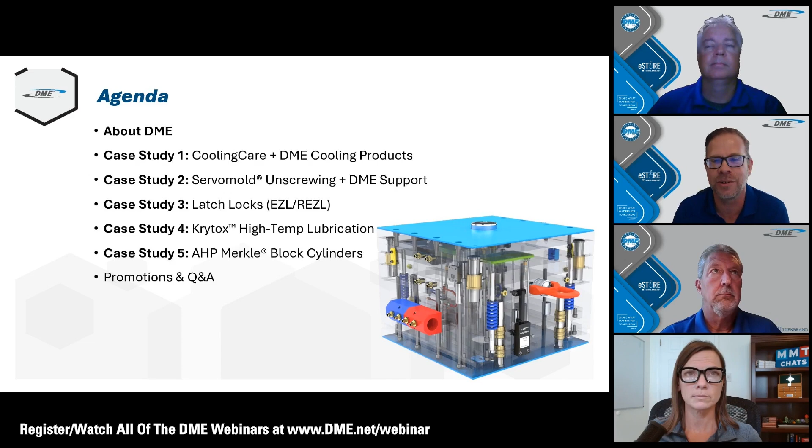What I want to do is take you through today's agenda. We'll have a quick, brief overview of DME, and then we'll go deep dive into several compelling case studies. These case studies will showcase our solutions, including with our partners Cooling Care, Servomold, Krytox, and AHP Merkle.

A little bit about DME: for more than 80 years, we've been a trusted partner in the molding industry, and our philosophy has always been simple, we focus on the part. We have over 60,000 SKUs in our catalog, and we're not just a supplier for you, we are your solution partner. Whether you're facing complex mold making challenges or you need guidance to get that job done right the first time, we're here to show you how to get success every step of the way.

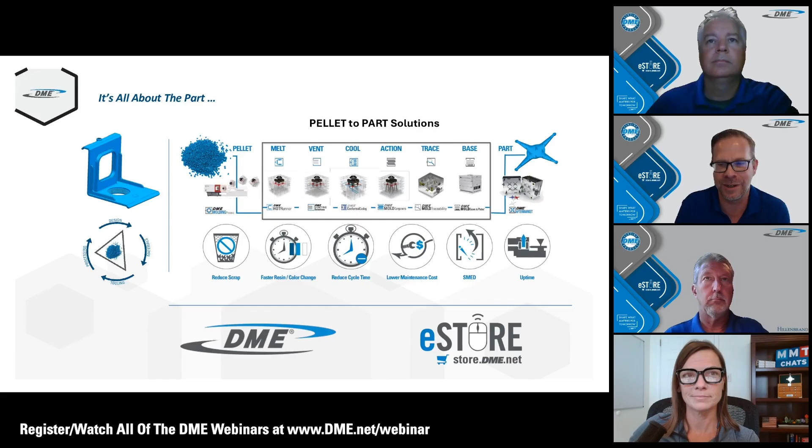Now, without further ado, let's dive into our first case study, and I'm pleased to turn the presentation over to Mike McCutcheon. He's going to talk about Cooling Care.

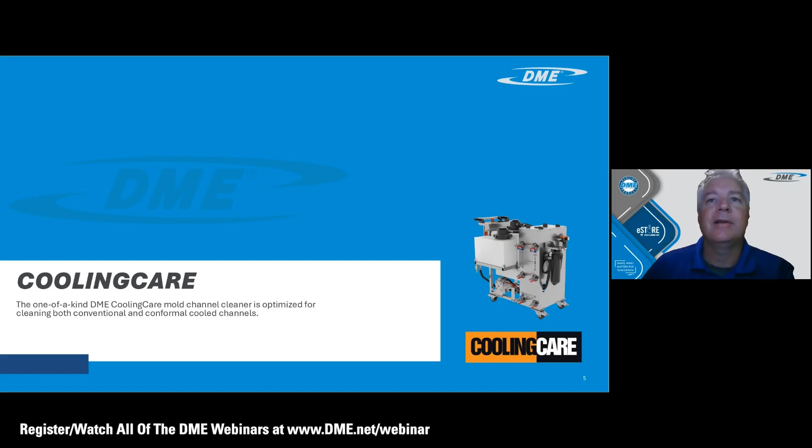All right, good morning everybody. This is one of the funner items that DME sells to talk about and go over, so let's start with the first slide. This is really the problem we try to solve with Cooling Care. No matter how you treat your water, whether you have a closed loop system or just an open system, you're going to end up with scale, especially with the heat and tight passages through the mold base, especially if you're using any type of bubblers or conformal cooling. You're going to get some buildup in there sooner or later, so we see scale and iron oxide buildups within the cooling channels.

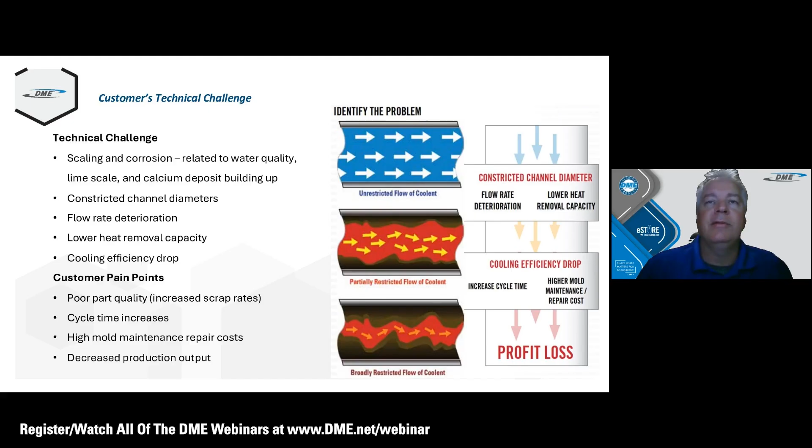They start off nice and free flowing. You set a baseline at the beginning of the mold when it's brand new, and then as the heat and the scale and rust buildup start to happen, the channels get insulated, and the flow gets less because of the less surface area. So heat transfer is less, and that's just like an insulation blanket going on the inside of that cooling channel. We want to prevent that, because that's going to start causing product issues and longer cycle times, to name a few. Those are the main two keys to start noticing if you're not monitoring your flow rates.

So next slide here, our solution is the Cooling Care. We've had this in the market now for probably a good 6 years, I want to say, but it's really a cutting edge technology, user-friendly interface with the PLC. You're able to download information, and you can store up to, I believe it's 3,000 tools.

So you can manage that really quickly, bring the tool over to the bench and just pop in that tool number, and each circuit will memorize what the flow rate should be, so there's no guesstimating on how clean it is or what the flow rate should be. It's already stored in that PLC.

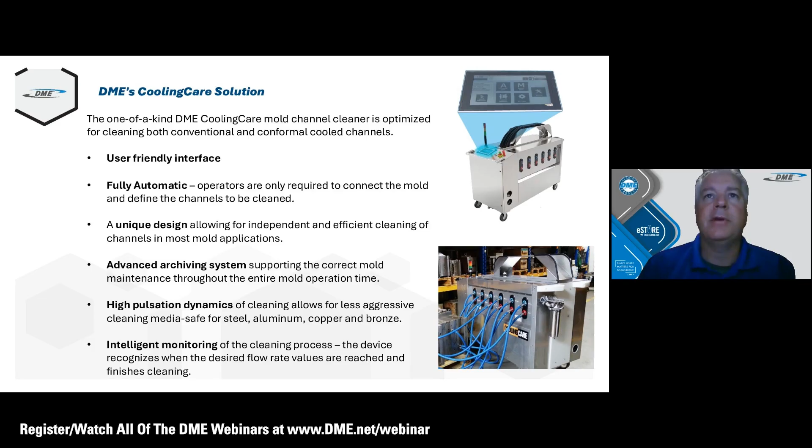So it's a very high-tech machine that also includes heat, pulsation, the pump, and then the media that we sell with it is a really good combination, one of the best in the industry, in my opinion. So next slide here.

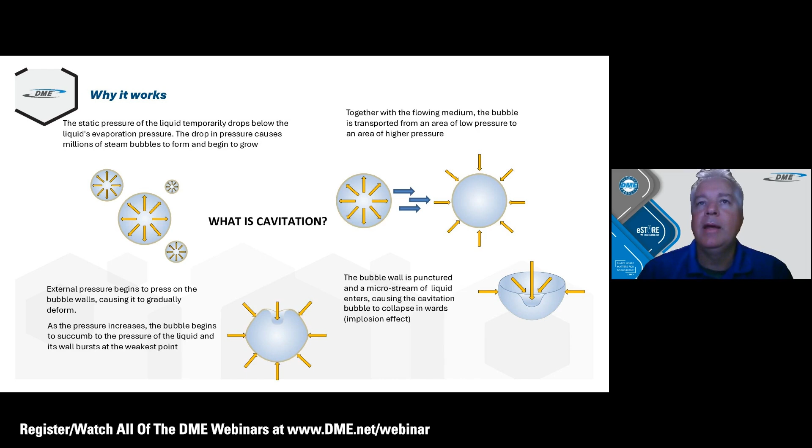One of the keys, or the patented processes, that Cooling Care offers is called the cavitation process. We have a video on the next slide to show the pumping in the system. We can go ahead and play the video here, and you'll get a visual of what's going on inside each of the cooling channels.

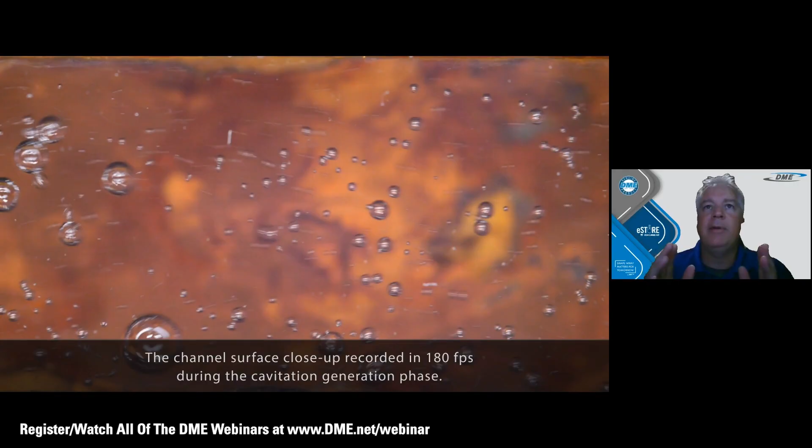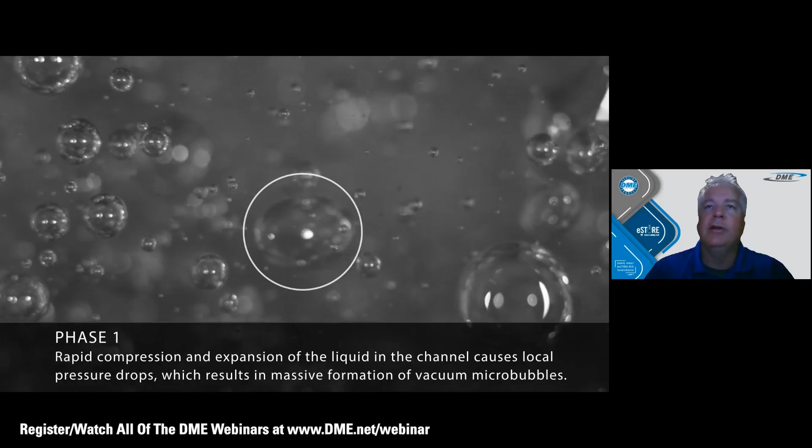As you can see, as the cavitation happens, the bubbles within the channel start to compress and they actually implode. What that does is release steam and do a steam scrubbing inside each channel. That's really the patented process that Cooling Care offers that nobody else can match in the industry. Right there you see the implosion, and that's the scrubbing action.

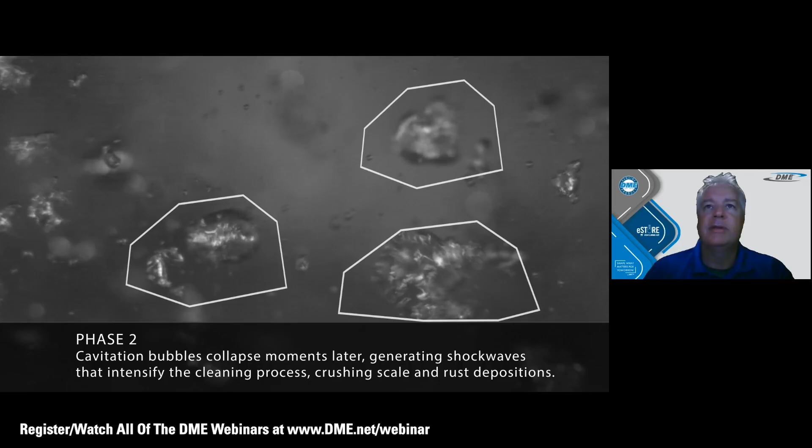There's some other competitors on the market that try to mimic this by injecting compressed air, but they're not getting this implosion and scrubbing action. Pair that with the chemical, the heat, and this implosion action, and it's the fastest cleaning machine on the market, bar none.

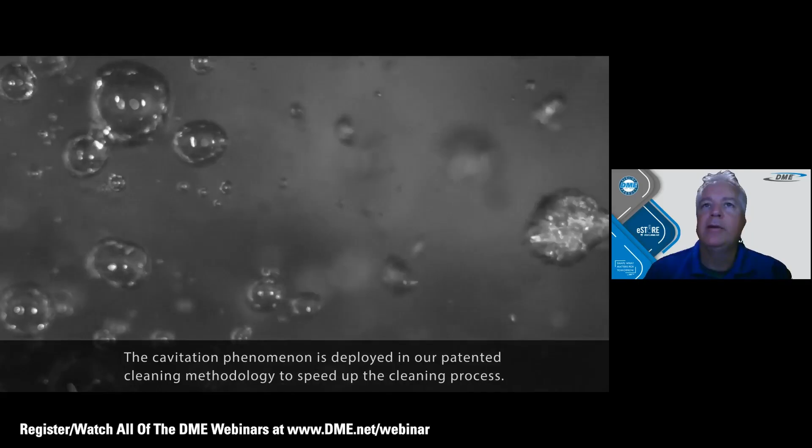So this is the ideal process, and this is what's happening inside the channel to really scrub and break up those particles. Later on you'll see the outcome, the chips and products that come out from this process. It's pretty impressive.

We like to call it gold because it's kind of like mining for gold, and it comes out in big chunks like nuggets of gold. So it's kind of interesting, and it's money that you'll save.

All right, so next slide. We get into our case study. In this case study, what we did was we used the CP2 Duo machine, which is one of the newer machines we've offered. I think we launched this about a year and a half ago. It's a really nice, affordable machine with 2 zones of pulsation and cleaning.

And then it comes with the tank on top for neutralization. So this is a really nice machine at an affordable price with a little bit of manual work to it, but it still gets the job done. Patented cavitation, just like all the other machines.

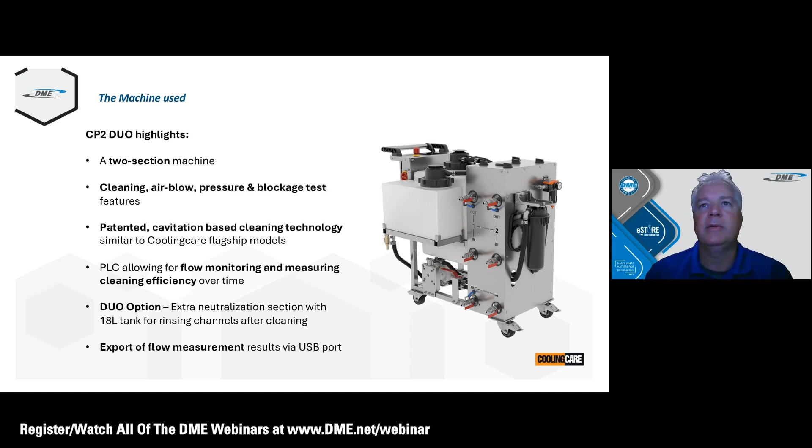It will measure and test for any leaks, and measure your flow rates. It still comes with the PLC to manage all that. So next slide, this is where we get into the case study itself.

What happened was we had a really small 4 millimeter diameter cooling channel that was plugged, causing major problems in production and quality, and longer cycle times. So we took on the challenge with the Duo machine, and this is the setup currently.

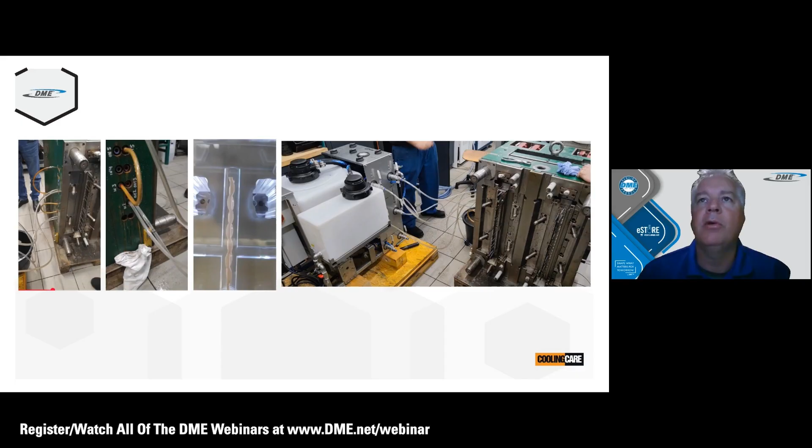Go to the next slide please. You can see there the 4 millimeter diameter is highlighted on the right, and the machine's hooked up to all the cooling channels there.

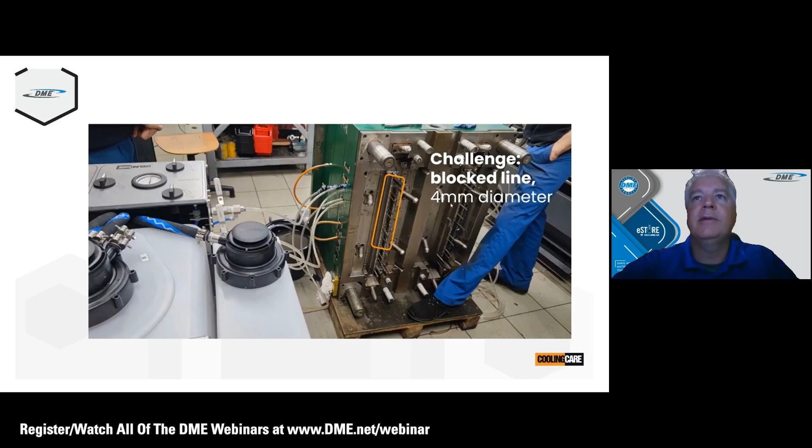So it gives you all the information, like I said earlier, your flow rates, your pressures, and everything like that. So next slide.

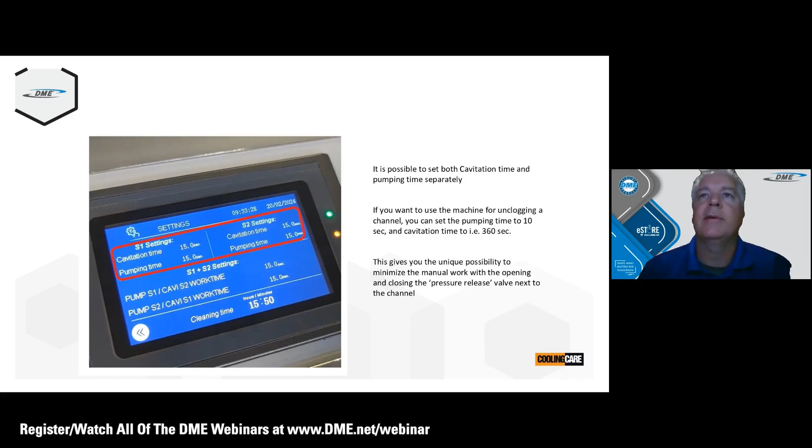So what we did was, this one was plugged. We like to get called in when we have some major problems to solve, because we usually can come through on it.

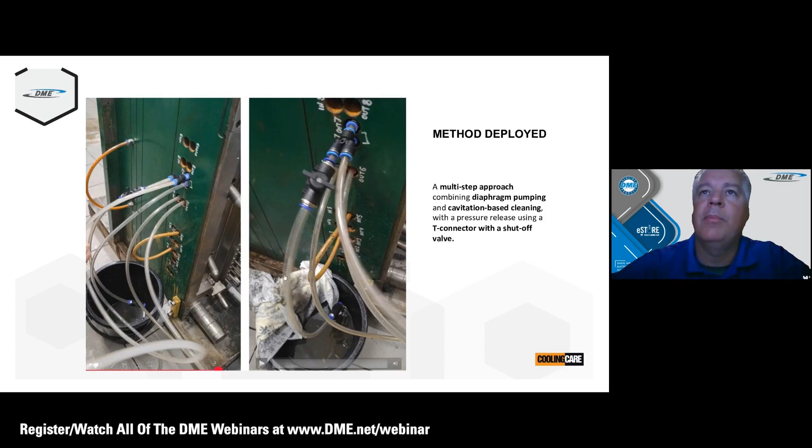This is one where we added a little T valve here so that the machine could fill up the channel and make sure it's getting all the water and everything to the source of the plug. Go to the next slide real quick here.

We fill everything up, and then once the pressure meets its maximum of what you set it at for that particular channel, it will stop. Then the cavitation pumping action from the diaphragm starts to try to pump, but it can't because it's at the maximum PSI, and there's just no room for that liquid to move back and forth.

So what we do is crack the T valve slightly and let a little bit of the pressure out, and then that diaphragm will start moving back and forth. As we showed you earlier, it's going to move that water in solution, and with the heat and the chemical all mixed together, it starts to eat away at that breaking point or that plugged area. Within I believe 4 hours of this one, we were able to break that free and get free flowing water to go through and start cleaning out that channel completely.

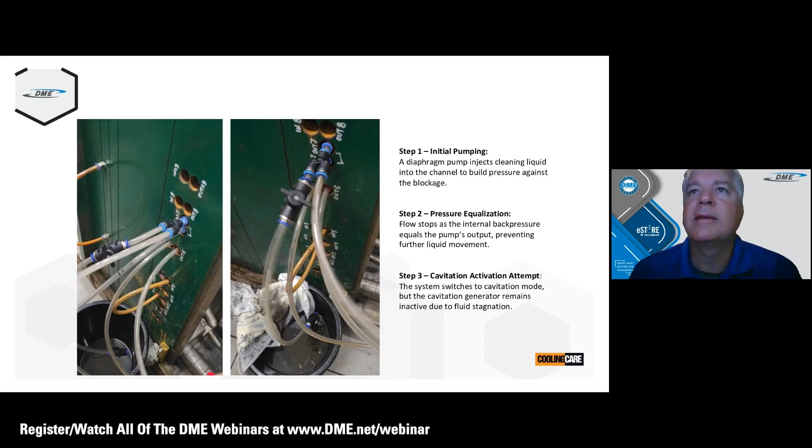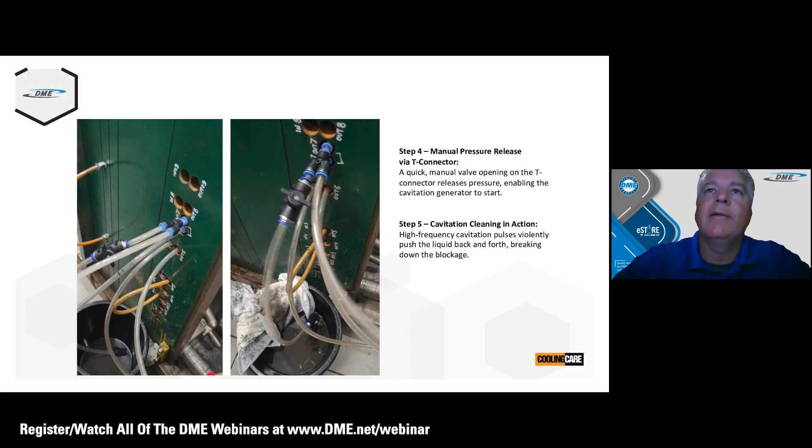Next slide, please. So this helps, so it's not so manual of turning off the valves and moving everything around within the system. Just the little crack of the T valve is what we're showing here, is really all that was needed.

Next slide. This is when you don't have a blockage, you can just hook it up directly with your standard cooling hoses. You can see this is in a tool room here, and it's just a standard maintenance process. This is where you'd want to be, where whenever your tool is down for maintenance, you throw it on the machine, let it run through the process, and say okay, this is tool number 1, 2, 3. All my channels are flowing to the flow rates that they were originally set to flow at when I first entered this tool into the PLC when it was brand new.

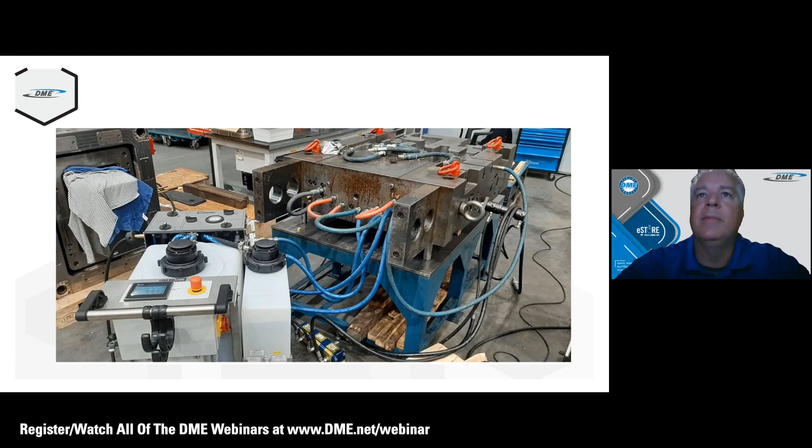And the machine will stop as soon as you meet those flow values again, so you're not wasting a lot of time. A lot of the other products on the market are just plug it in and you let it clean, and you don't know if you need 2 hours, 20 minutes, or 8 hours to figure out if it's clean or not, because everything is all right in this system here. It tells you instantly, and you're not wasting a lot of time, and you can get it onto the next tool that's needed. Next slide, please.

So this was kind of the gold that we got out of that plugged unit there, and it shows the flow rates in the upper left-hand corner from the PLC, how they went from 7 to 12 and 7 to 12 there, and 4 to whatever that next number is for percentage there. So it's major flow rate increases there, and cleaning out the channels.

You can see the pictures from the endoscope on the left and right, and you can see how dirty those were. So it's just all that scale and lime buildup. And again, you get these pieces that break free, and it's a pretty impressive machine that kind of pumps that right on out of there. It's really just hindering your heat transfer big time. So next slide.

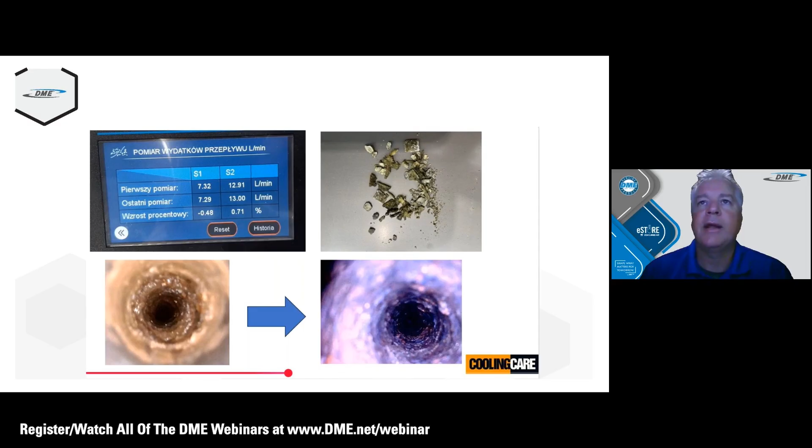This is what we have to offer. We've expanded the line, as I stated earlier. There's a CP series, which is the good product. It's very simple to use, typically a single zone, has pulsation, but typically does not have heat. So you save some money there, but you may have a little bit longer cleaning time without the heat.

The CM and CMS series, we have a couple different series there. That one does have the heater option, and then it usually comes with an optional pulsation zone, typically 1 zone for those, and comes in 4 to 7 zones of the pumping action just to get the material through the tool itself to clean it.

If you have a good maintenance program going, and you don't let your systems get plugged up, and you don't inherit tools that are really gummed up, the CM series is a really good series to employ in your operation. You don't really need the pulsation as much if you don't have really gummed up tooling, the chemical and the standard pumping will clean everything up pretty well.

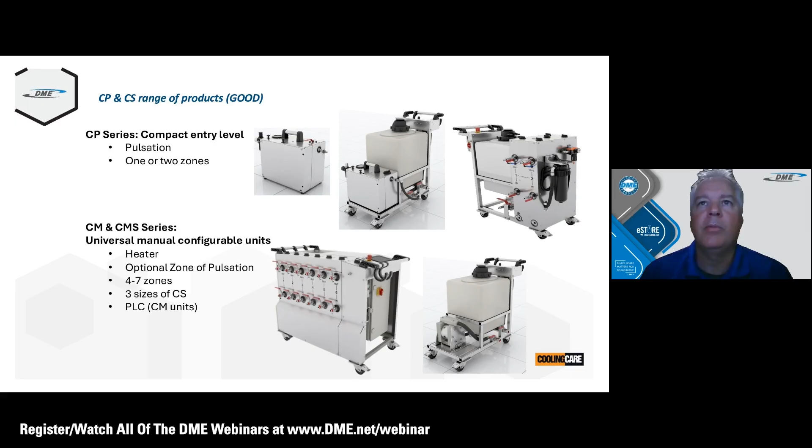The nice thing about this unit is that the PLC walks you through every step and will highlight which lever needs to be turned in which direction. So it's very user friendly.

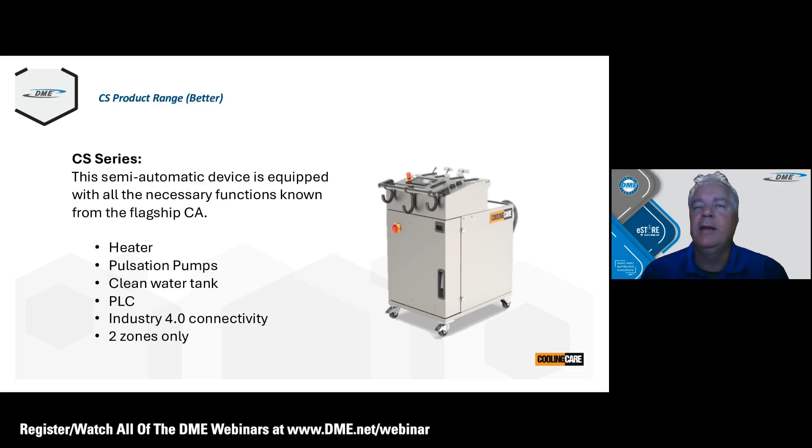Next one, and this is the flagship unit here. These are the CA units. It has everything. You just hook it up and put in the PLC which tool you're utilizing and which channels you hooked up to, and just let it go. You can put it onto the cleaning section and it will do all the testing. It will do the air pressure tests, the flow tests, and then once those all pass, it will go into the cleaning mode. And if you set it to the return to normal mode, it will clean until that has been achieved on those flow rates.

Then it pushes the cleaning chemical back into the tank, all contained with compressed air, and blows it out. Then it has a diagnostics tank with clean water that it runs through and does all your checks on flow rates and things like that. So a really cool unit with all the bells and whistles.

It has Industry 4.0 connection, so if you hook up a SIM card to it, it can give you a text if there's a problem, where it stopped, or if the cleaning is done. So really interactive units.

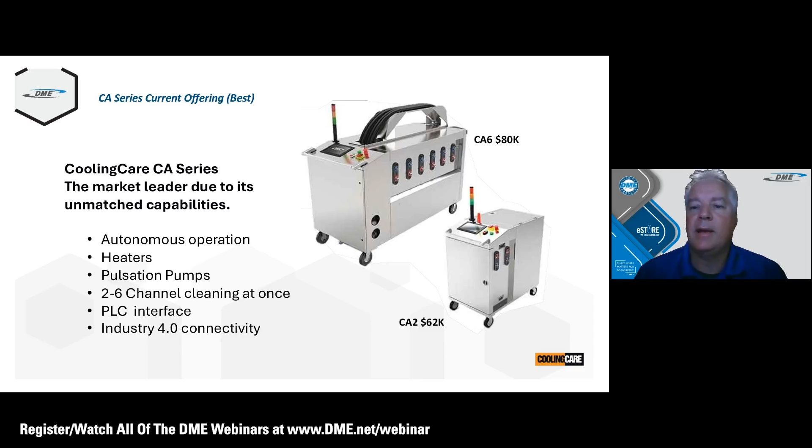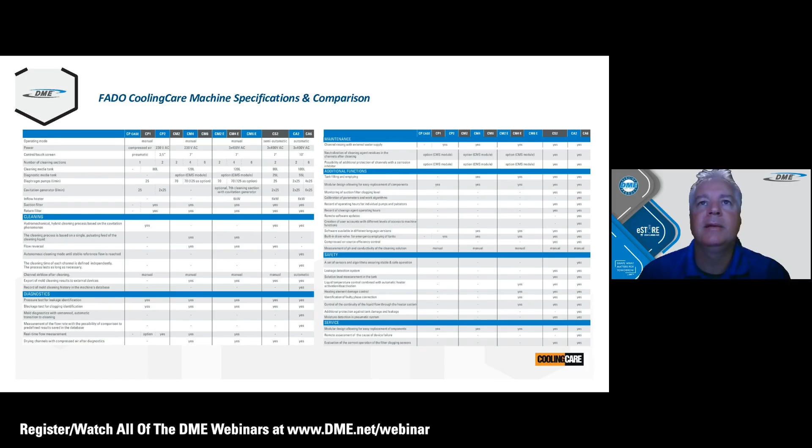A couple more small case studies. 200 conformal inserts were fully blocked. The customer was considering a full replacement of the whole fleet at the tune of $250,000. This is where Cooling Care really shines - these conformal cooling inserts, hooking them up and using that cavitation process to get them unblocked, because you have so many contours and small dimensions within the conformal cooling arena, and those are expensive. So you want to make sure you can save those, keep them clean, and keep them operating to their potential, because that's what you invested for, right?

It's to make sure that you got a really nice part out of there in a quick amount of time, and this is really what you need to clean those up and make sure you're getting the best out of your investment. So no cost to replace those or have them made, or even wait for them to be made. Just hook up the Cooling Care machine, and within a few days you'll have an insert ready to go.

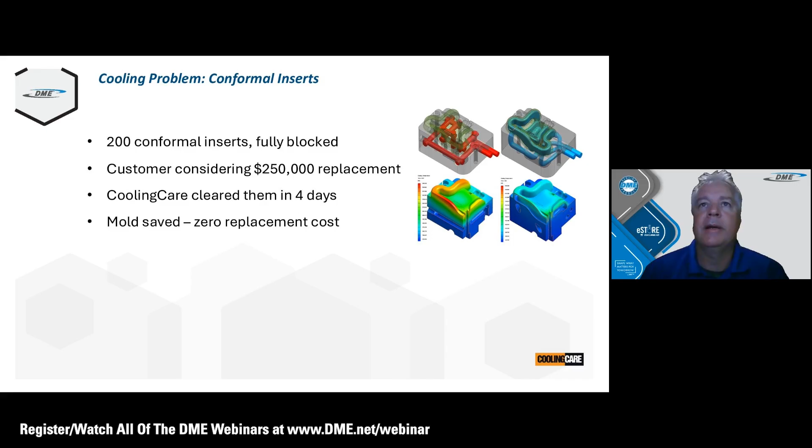Same with bubblers. Bubblers are super standard, right? The dimensions on these get pretty small, 2 millimeters in this one. Typically it was taking 5 days to pull that tool out, disassemble it, clean them up, or buy new bubblers. Again, another 2 to 4 hours of cleaning and increase the flow by 200% through these bubblers.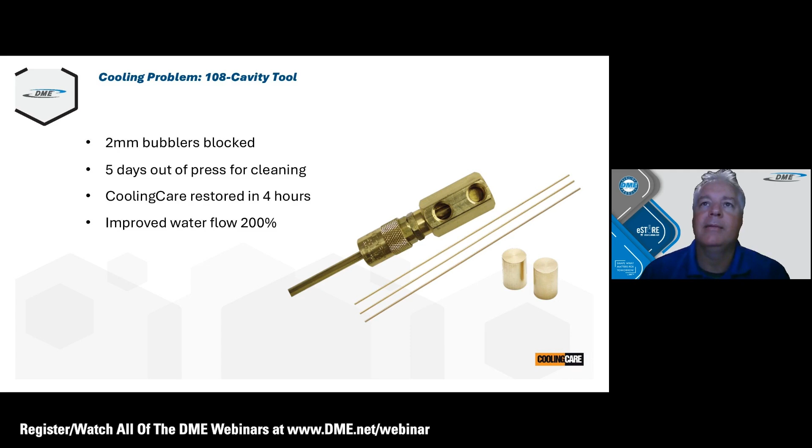And so that's it about Cooling Care. If you have any questions on that, please enter them into the chat, and we'll get to them at the end. I also just want to talk about FlowSense really quick.

On the next slide, if you're utilizing Cooling Care, or even if you're not using Cooling Care, this is a really great tool here. It monitors all your flow rates, gives you temperature, pressures, delta T's, everything you need to know about your cooling channels. It comes in multiple arrangements depending on your application.

There's the FlowSense 1 in the bottom right. It will do temperature, pressure, and flow rates for a single zone. The 2, in the middle on the bottom, is more of a stainless steel option, so if you need stainless steel manifolds, and it has the separate readout there with the cord.

The 3 and the 4 are identical units. The 3 is just mounted right to the manifold itself, the water manifold, in the upper right-hand corner there. And the 4.0 is on the left. You can hook up to 4 different manifolds there, monitoring 48 zones of cooling.

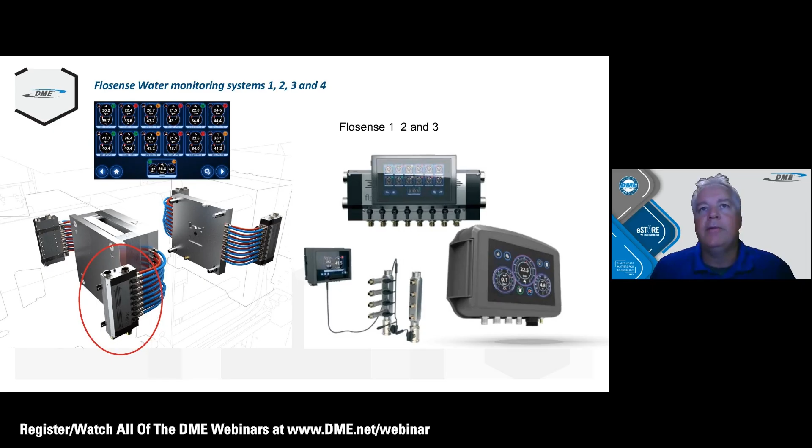And that's all for me. So if you have any questions on any of this product that I went over, please put something in the chat there. I'll be happy to answer it later on.

Right, Jeremy, your mic might be muted. I apologize for that, it was muted indeed.

Jeremy Such here, just want to do a quick overview of a servo mold application and then talk about latch locks for a few minutes.

Servomold is a German company, and DME is the exclusive partner of Servomold for the United States and Canadian markets. So we work closely with them when a customer brings an application to us. They engineer and design the system to meet the application needs, and then DME facilitates the installation and startup of that system here in North America.

Servo mold can be either an unscrewing device or used for plate movement. When used for plate movement, the plates can be moved in increments of 180 degrees or 120 degrees. As we're going to look at here as an unscrewing device, there are several different types of configurations that can be put together to meet the application need.

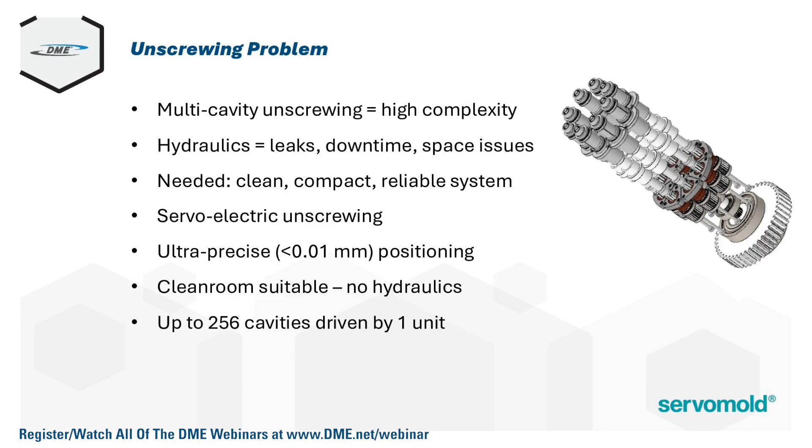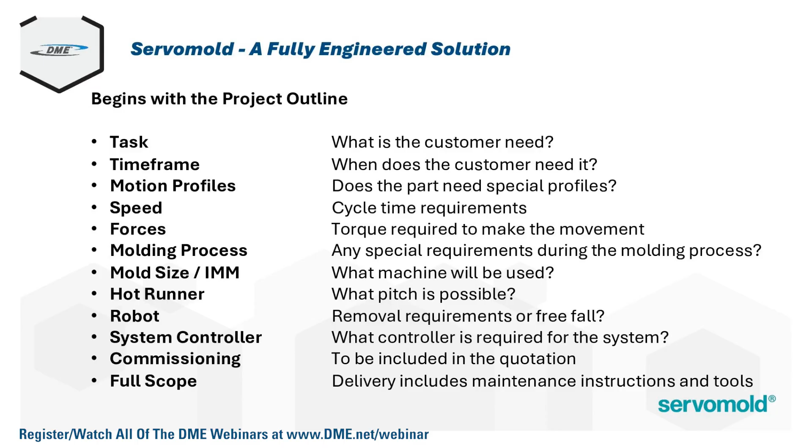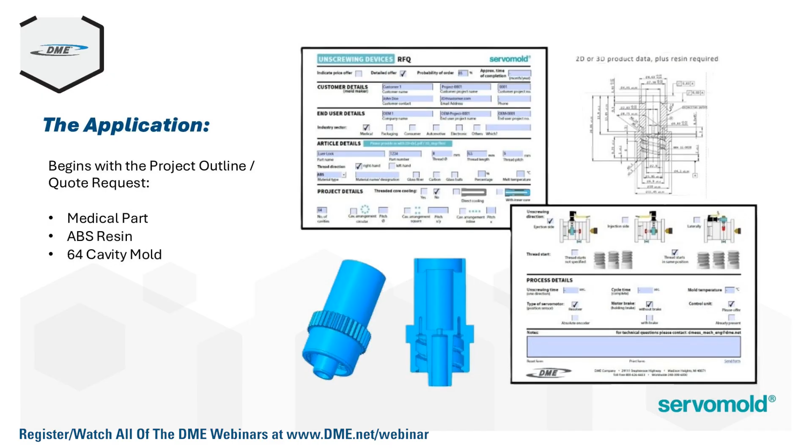In this particular application, this was a medical part. ABS was the resin, and the intent at initial design was for a 64 cavity mold. So again, based on that part size, the length of the unscrewing and so forth, servo mold went to work with our application engineers. Next slide, please.

Again, just as a part of the design, Servo has a number of different standard configurations of the drive mechanism. That doesn't necessarily mean standard in size, it just means standard in configuration. So in this particular application, we were looking at actually one drive that through a series of contained gears, is going to drive 6 different cores.

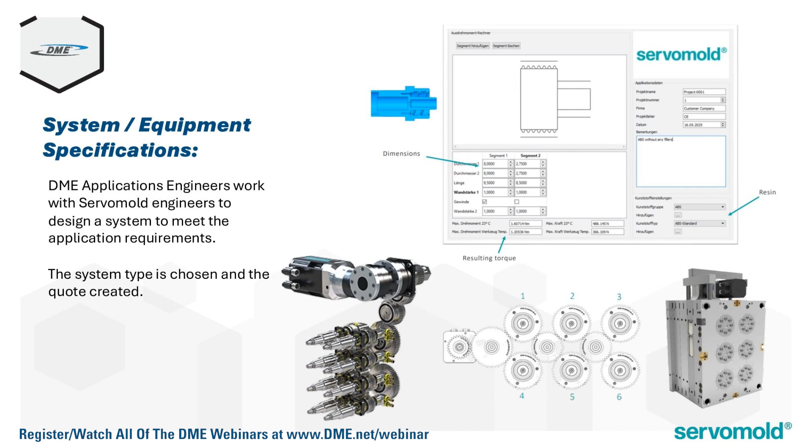Next slide, please. And then each one of those cores ended up with 8 actual unscrewing cores on them. So the project, although initially expected to be a 64 cavity, through the design of the servo system, was actually reduced to a 48 cavity. This, of course, in very close conjunction with the mold maker and the mold owner. And this is driven off of one motor here, this particular application. That's what was designed for this.

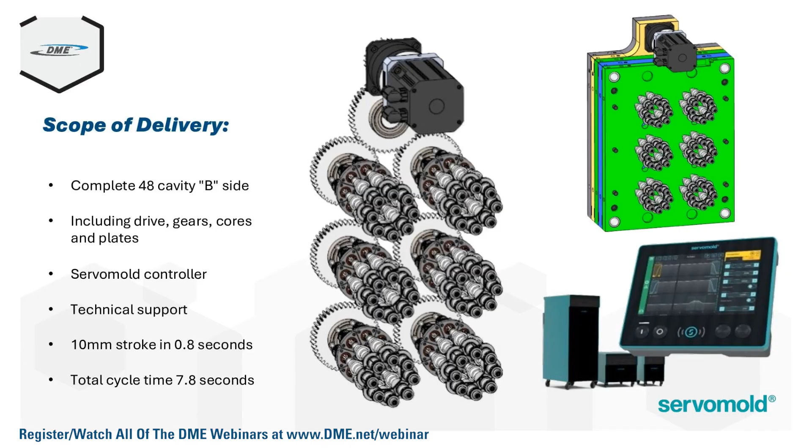Servo mold also, we do try to bundle the actual controllers with the drive mechanisms. That doesn't necessarily have to happen, although bundling with the servo controller is very convenient, because servo actually will write the initial control algorithms right at the mechanical design of the system. But if we do introduce a third-party controller, then that just creates a little bit more work for the mold designer to do with that controller supplier. Next slide, please.

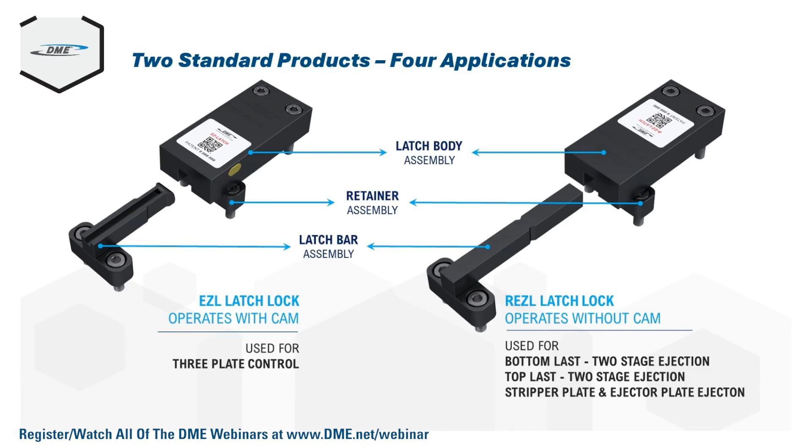Again, very high level on that. I apologize, we're so short on time. But servo has a lot of different applications, and we'd certainly like to discuss your next plate movement or unscrewing opportunity with you.

Moving into a standard mold component here, not necessarily customer application driven, but application driven with regard to the different products offered in our Easy Latch latch lock family of components. On the left, you can see our original and standard Easy Latch lock for 3-plate control. On the right, we have our REasyL or reverse Easy Latch product, used for even more complex multiple plate control.

The standard Easy Latch for 3-plate control. For the configuration here, the latch lock body goes on the top clamp plate, the latch bar goes on the B plate, and the retainer goes on the A plate. This step diagram shows the motion of the plates as the mold opens.

Basically, the EasyL allows for precise 3-plate control during the parting line opening. The B plate and A plate move together for the designated stroke to strip the runner, and then the B plate disengages from the A plate, allowing the parting line to open.

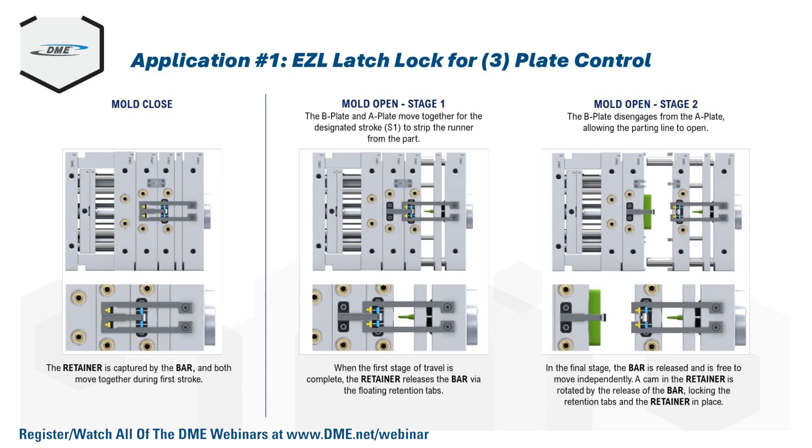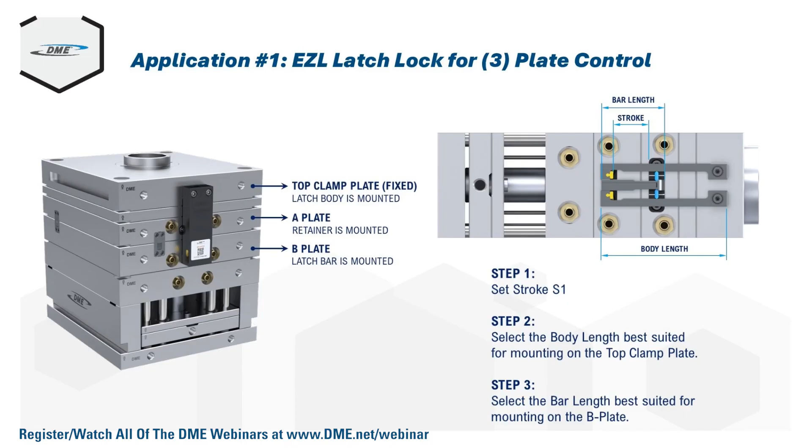Here you will see where the different components of the Easy Latch mechanism are mounted, which plates they're mounted on. You see a cutaway view of how the internal latch mechanism works, how it's configured, and what it would take for the mold designer to configure the specific Easy Latch product for the mold they're working on.

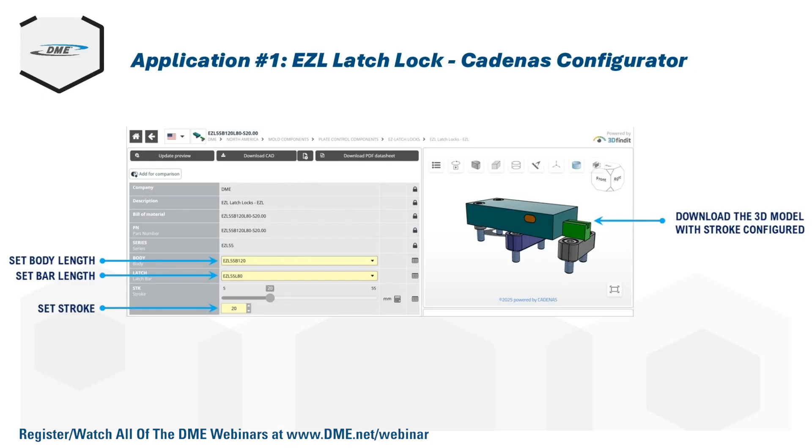We introduced about 2 months ago, in the DME Part Solution or Cadenas platform, complete product configurators for all our Easy Latch products, where the mold designer can choose his application, whether for the EasyL or REasyL products, and set strokes and so forth. The part number will be configured automatically for them, so it will be easy to contact DME customer service or go to eStore. As importantly, or perhaps more importantly, the CAD is generated via the platform, so the mold designer can drop it right into their design.

Applications 2, 3, and 4 are all based on our reverse or REasyL latch locks, for a bit more sophisticated plate control, same principle as the EasyL product. I skipped over that the EZL latch lock uses an internal cam mechanism used to lock and release with the movement of the plates. The REZL products do not use that cam; all of the release and capturing of the plates is controlled via the latch bar and internal components in the latch body. The first application for the REZL product is two-stage ejection bottom last plate control.

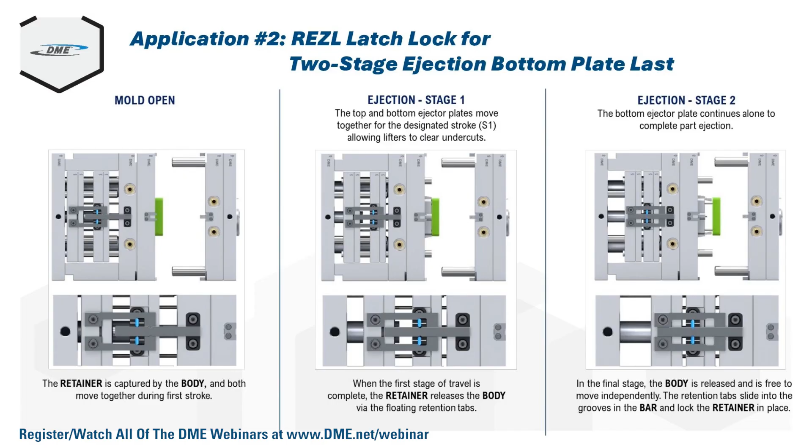Both ejector plates, spaced apart, move together for the designated stroke S1, the first movement. Then the bottom ejector plate is released and continues to move independently for the final stroke of the application, so the part can be ejected.

Mark, did you advance the slides? I had a glitch there in my display. One more, please.

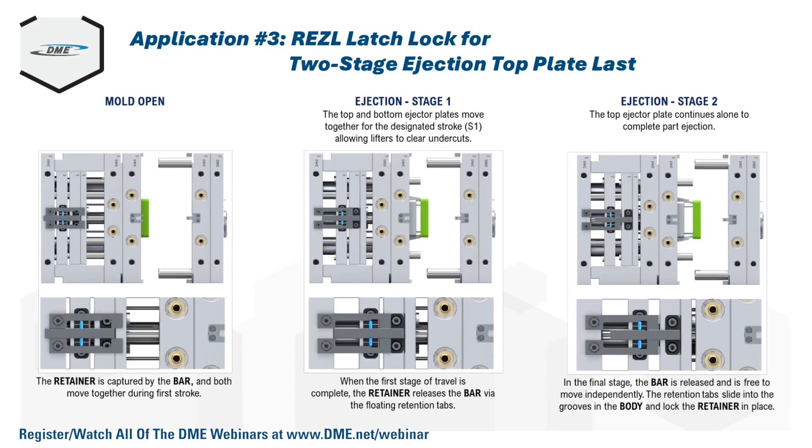Application 3, as noted, is again an REZL product, and in this case it's configured for two-stage ejection top plate last control.

Here you can see where the components are mounted. We're using the same product, just configuring it slightly differently and rotating how it's mounted to the actual mold base. In this configuration, the body is on the fixed bottom clamp plate, the latch bar is on the top ejector plate, and the retainer is on the bottom ejector plate.

This configuration allows precise plate control over the top last two-stage ejection process. Both ejector plates move together for the first stroke S1, and the top ejector plate continues to move independently for the final stroke required to eject the part. So again, just the opposite operation as the previous example.

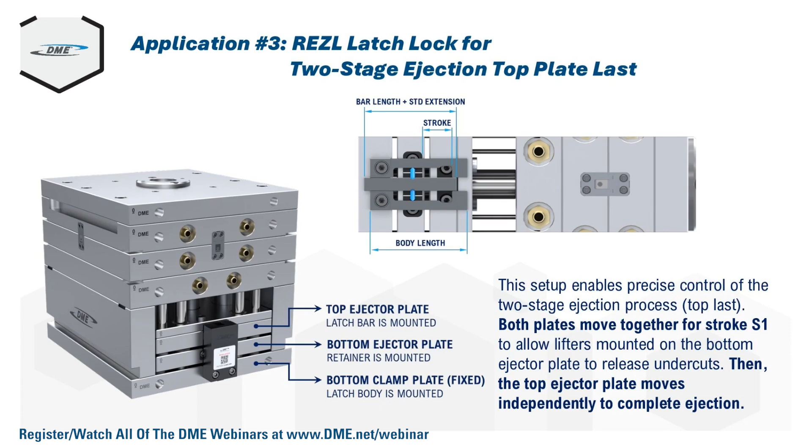I think I skipped over this previously, but again, this configuration is also fully configurable within Cadenas to help establish part numbers based on stroke and provide the CAD for the mold designer.

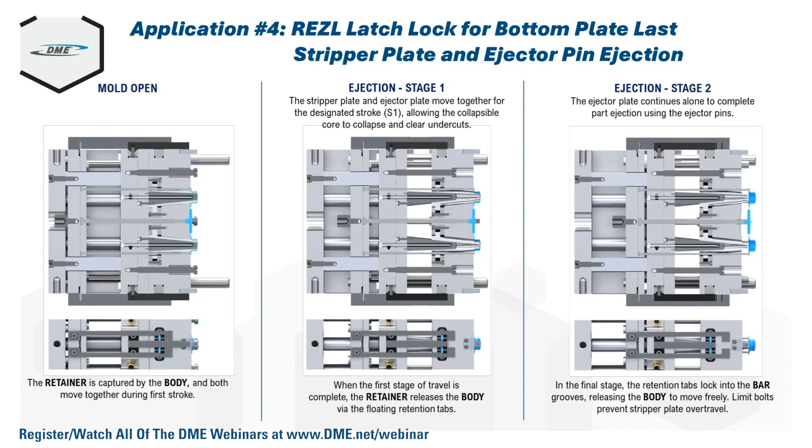And next slide, please. And the last application we want to review this morning, as noted, another REZL application for bottom last stripper plate and ejector pin ejection.

Next slide, please. Here again, looking at the mounting, in this case the latch body itself goes on the ejector plate, the latch bar on the support plate, and the retainer is on the stripper plate, the B plate in this application. So this configuration allows for precise control of both the B stripper plate and the ejector plate.

The stripper plate and the ejector plate move together for the first stroke, S1. This synchronized motion is critical for collapsible core applications. After that first stroke, the ejector plate continues to move independently for the final stroke needed to eject the part with ejector pins.

So we really crammed a lot in there in a short period of time because we are so limited. Basically the intent of this quick presentation is just to demonstrate the versatility of the EZ Latch product line. These are all stock products for DME.

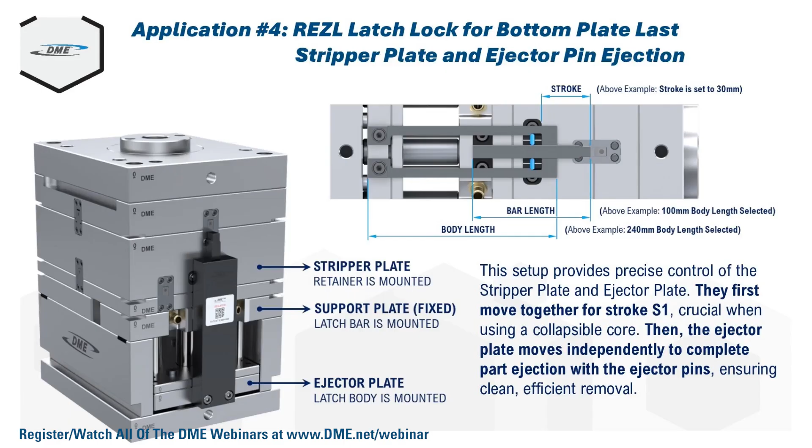If we go one more slide, please, Mark. Again, I just wanted to make sure the audience is aware that the Cadenas configurator is now fully up and running and available, for part number creation and assistance. Sometimes it can be a little confusing for the mold designer to establish stroke and determine what he really needs in the way of a particular assembly. The configurator will auto-generate part numbers and really facilitate that mold design, making it quicker and easier.

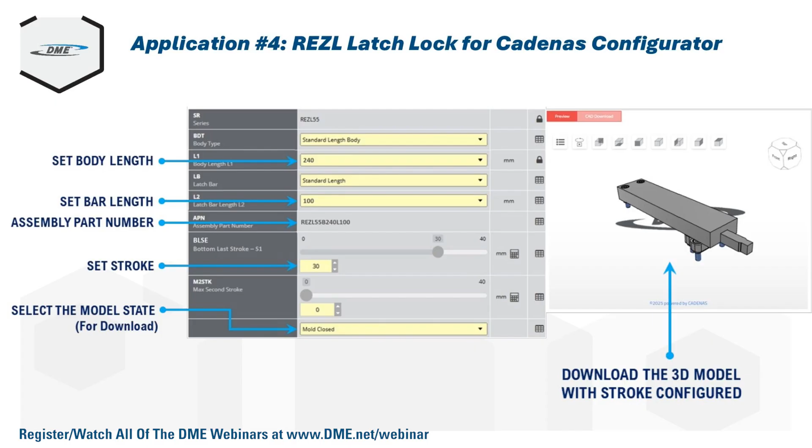Any questions at all with regard to the EZ Latch products? Our engineering team is readily available. It can actually help you if the Cadenas platform isn't sufficient for the work that you're doing. So thank you for your time. Again, any questions, please drop them in the chat and we'll address them at the end of the presentation. Thank you.

Okay, Neil, you're up. Check your mic. Can you hear me? We can hear you. Good. Let's proceed.

Okay, we're talking about the Krytox TM7 grease. We have a case study where a customer was experiencing pin breakage on some 12 millimeter pins in a high heat application. What we specified was the Krytox TM7, and he applied the grease and actually went from 50 to 150 shots where he was receiving failures, to over 10,000 shots without any breakage.

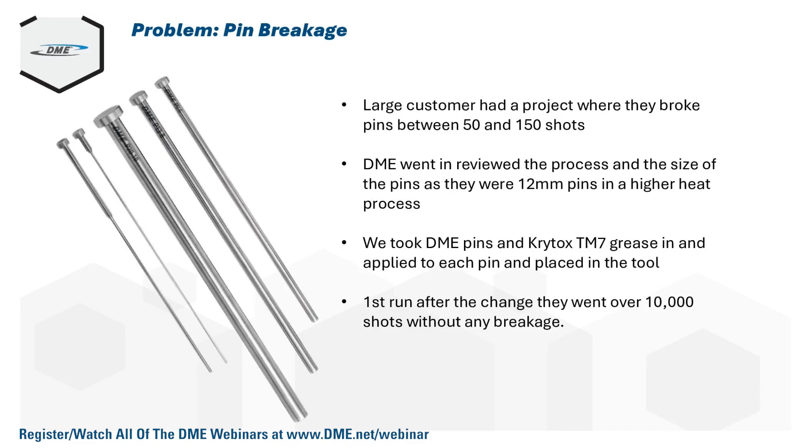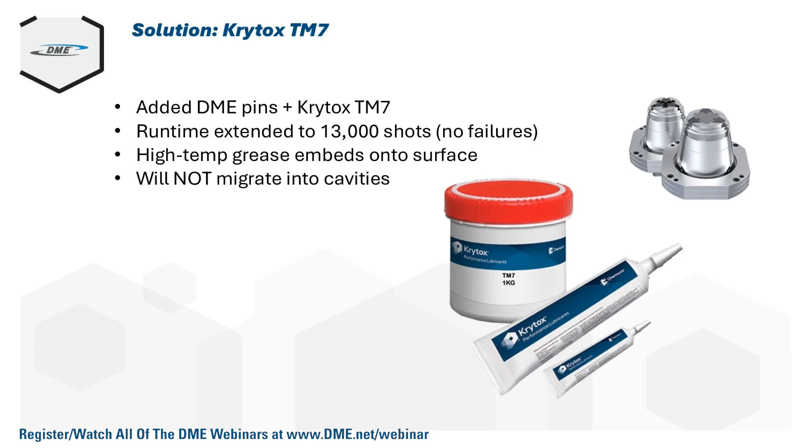Next slide. Also extended the runtime up to 13,000 shots without any failures. The high temp grease actually embeds into the surface of the metal on the pins and it won't migrate into the cavities. DME also recommends and actually provides collapsible cores with the Krytox grease on the mechanisms.

Next slide. The Krytox is superior to a hydrocarbon grease. We've done some testing in an oven where at 232C for over 40 hours, it shows that the Krytox had zero weight loss versus a hydrocarbon grease, which experienced 40% loss. So the Krytox is non-flammable, it doesn't have a flash point, it doesn't oxidize, so it has an indefinite shelf life. There's longer maintenance cycles, exceptional lubricity, and it doesn't migrate from the point of application.

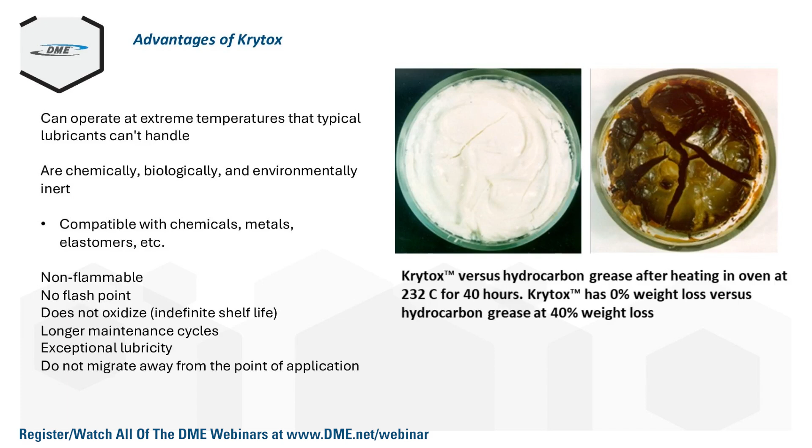Next slide. This shows just contamination of grease as determined by color. When using the Krytox, it's recommended that you wipe off your pins with mineral spirits or mold cleaner and a rag. And also you can start with new pins as well, which is recommended.

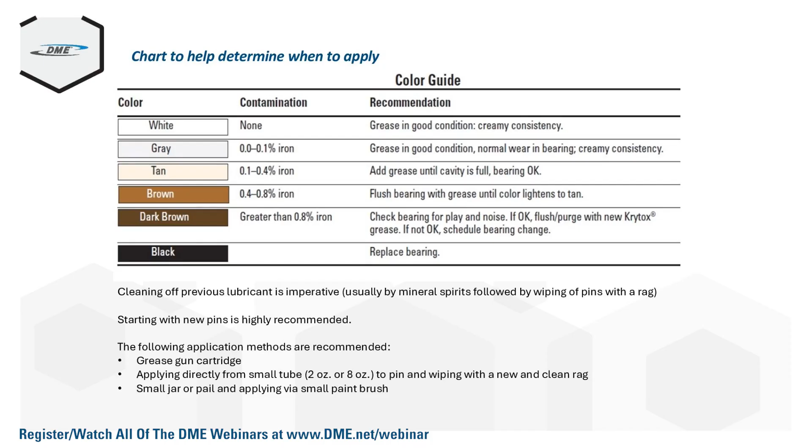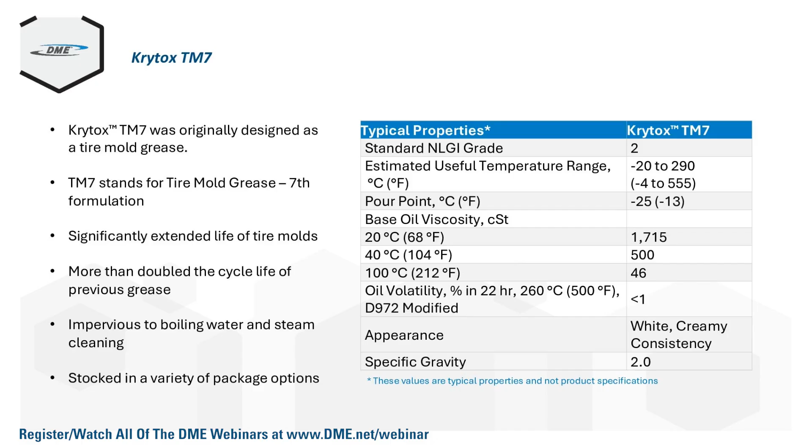TM7 stands for tire mold grease, 7th formulation. And it's impervious to boiling water and steam. So it's a really good product. There's also a higher heat Krytox available, which is their valve grease. So if you need something over 555 degrees F, give us a call and we can talk about the higher heat grease.

Next, we're going to talk about the Merkle AHP block cylinders, and we're comparing the block cylinder to a typical tie rod cylinder. As you can see, the block cylinder is one piece. It also is very robust.

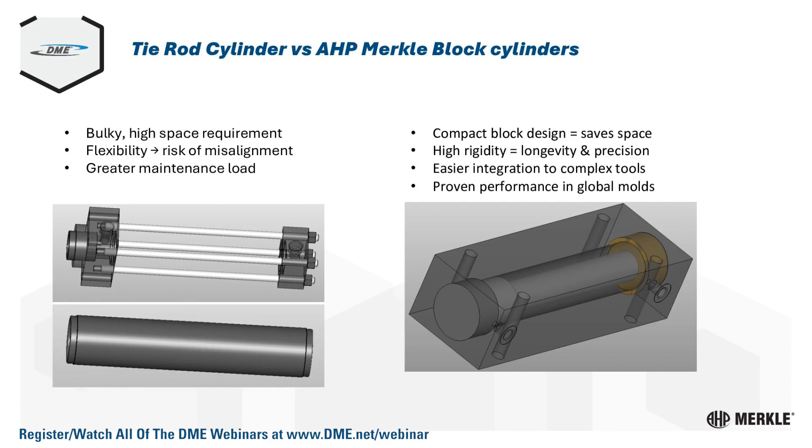And next, the tie rod is roughly 7 pieces in the body. The block cylinder is a single construction, a little more streamlined, less opportunities for leaks. Your line pressure on a tie rod cylinder is 250 bar, while a block cylinder is typically 500 bar, and a bar is 14.5 psi, so keep that in mind.

The smaller cylinder can also be used in different configurations throughout the tool. A tie rod cylinder typically is mounted on the outside of the tool or on an extension plate, and block cylinders actually can be buried into the tool design. Very, very streamlined.

Also, one of the features of the block cylinder is you can get them with a cooling jacket. So if you're running high heat applications, either in die casting or some of the higher heat resins, you can protect the seals and the hydraulic fluid by adding that cooling feature. That is an option. Also, through the actual rod mount of the tooling components that actually meet the plastic, there are possibilities for adding a cooling channel, a bubbler right through the cylinder.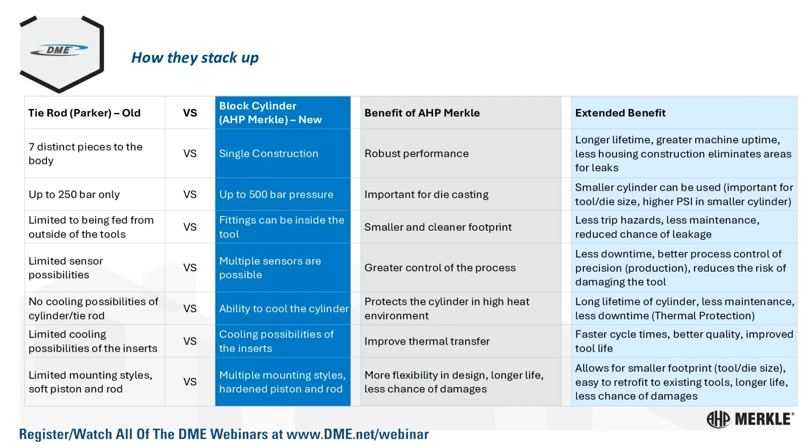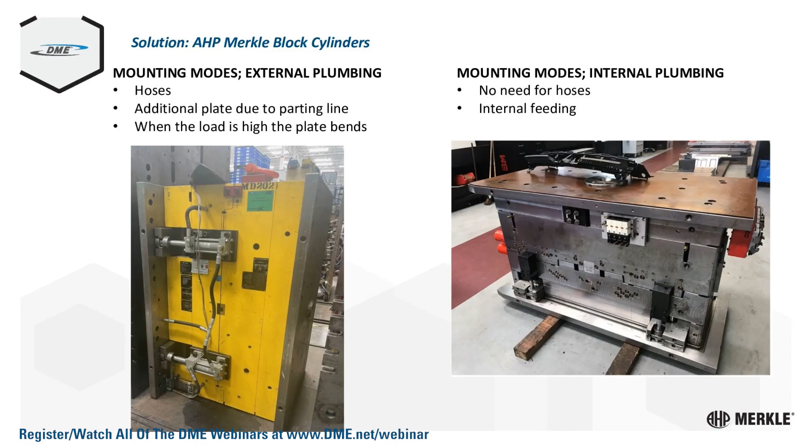Next, as you see, the tie rod mounted outside, you have hoses, and it looks like it's not as neat as the solid cylinder on the inside on the right. Next.

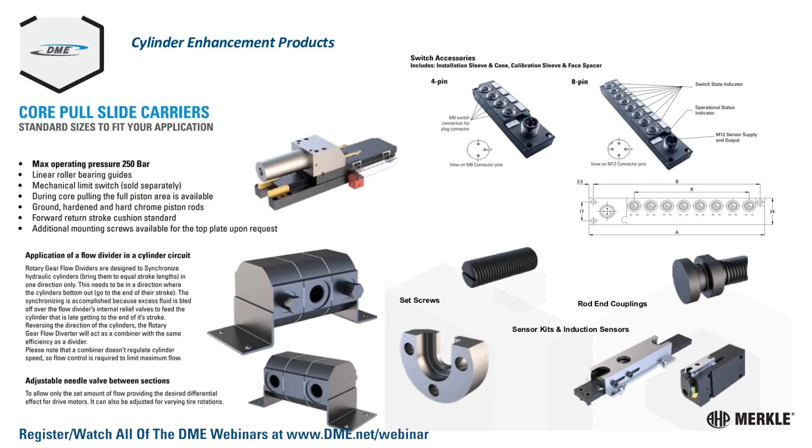There's also many enhancements available. We have core pull slide carriers that you can just add to your tool to lessen some of the machining that you have to do to put a core pull on the side of a cavity, and that is all offered by Merkle. We also have flow dividers that help distribute to make a synchronous hydraulic cylinder circuit. And there's all sorts of switches that we can add on as well, and also mountings. Next.

And if you have any questions, I can answer the question as well.